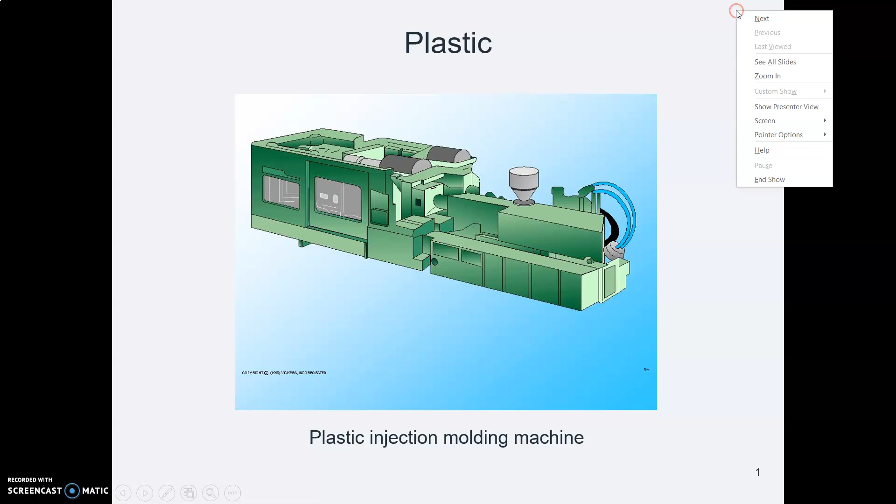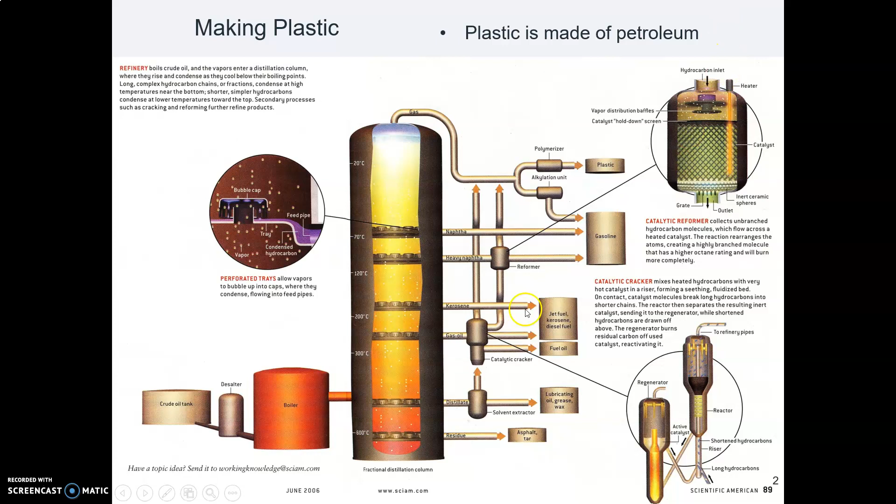Last time we looked at metal as a material. Now let's look at plastic as a material. Plastic is a petroleum product, and crude oil comes in at the refinery, is piped into a distillation column. Various products come off at different heights in the column, and near the end is plastic.

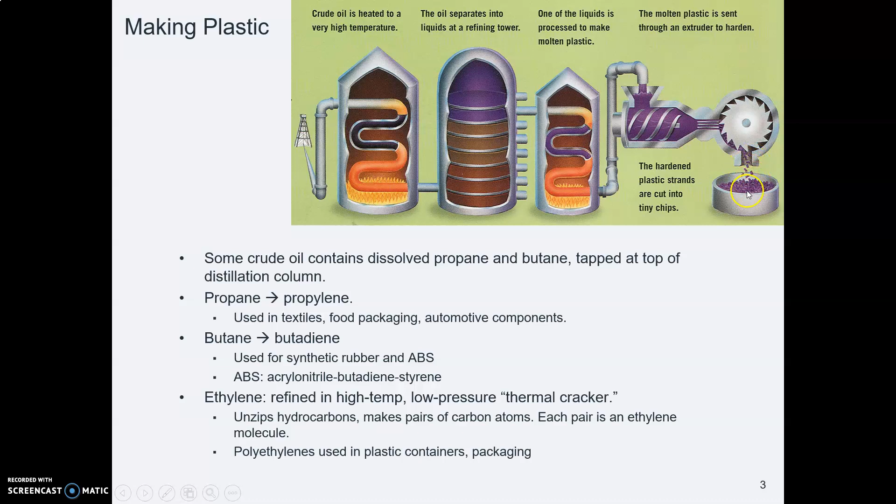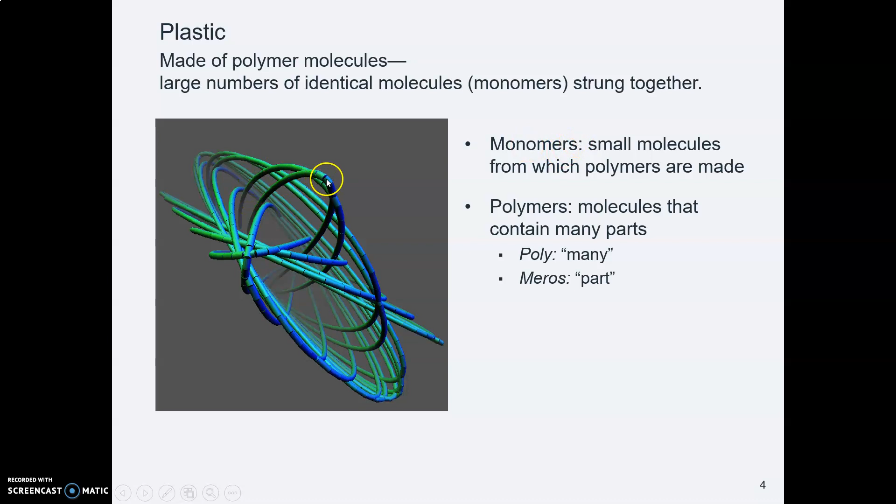And here's a diagram of the plastic getting chopped into pellets. They actually come out white, not purple. Plastic is made of polymers. You've probably heard that word. Polymer is a word made of two parts. Poly means many, and meros, the Greek word that means part. So a polymer is a molecule that contains many parts. It contains many monomers, and monomers are the small chunks of molecules that are strung together to make polymers.

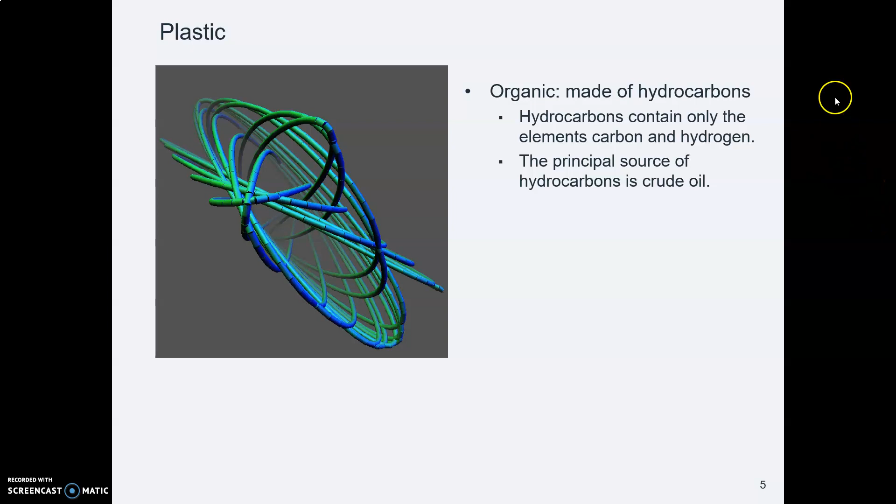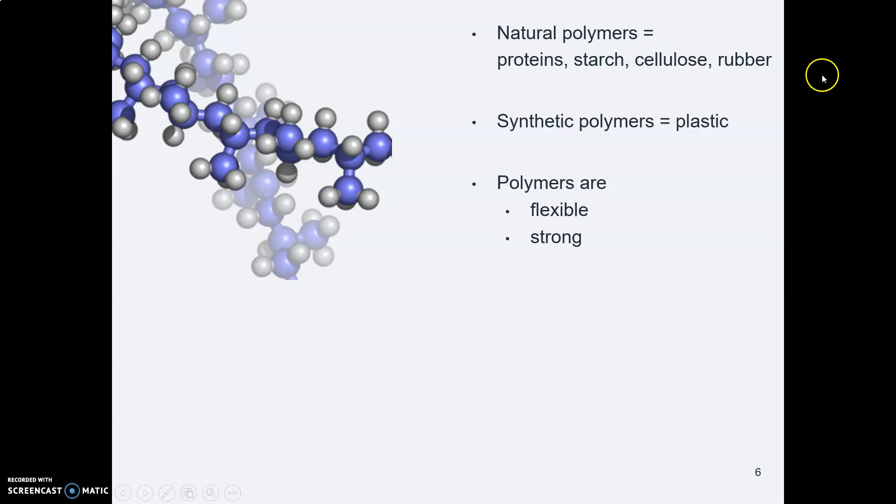Plastic is a hydrocarbon. Petroleum is a hydrocarbon. Living things are hydrocarbons. And of course, petroleum was originally formed from plankton in the ocean, which was made of carbon and hydrogen. Polymers can be made of many hydrocarbon materials. So if they are synthetic polymers, using all sorts of manufacturing processes, then we get what we know as plastic. But in the natural world, there are many polymers also made of many monomers. Cellulose is a common example in plants. Polymers are made of many, many monomers.

All right, there are two categories of plastic, and they behave differently. One is a thermoset. Thermoset plastics, when you heat them and melt them, a chemical reaction takes place. The chains of polymers form molecular bonds, they cross-link, and a thermoset cannot be remelted. It's a one-time melt. You might find thermosets under the hood of a car, some of those plastic parts around the exhaust. Those have to be thermosets so that they don't soften and melt when they get hot. Plastics which are used for microwave cookware are thermosets.

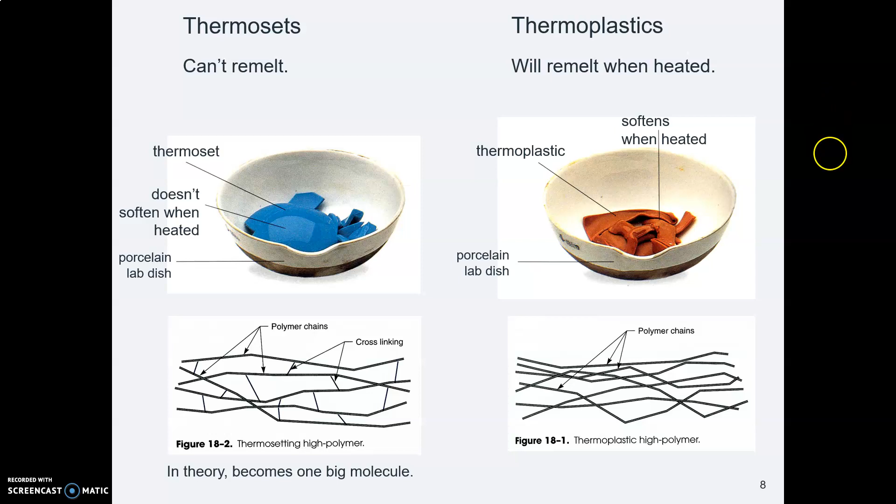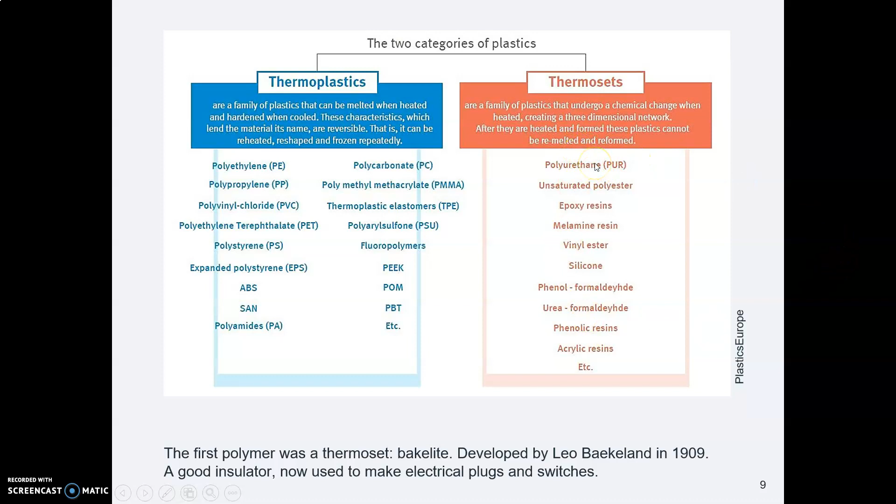In contrast, a thermoplastic is one that softens every time you heat it to a certain temperature. You can melt it, form it into something, and then you can take that something and melt it again and again. That's a thermoplastic. Here is a list of some of the thermoplastics and some of the thermosets that we encounter. So for instance, polyurethane is a thermoset. Polyethylene is a thermoplastic.

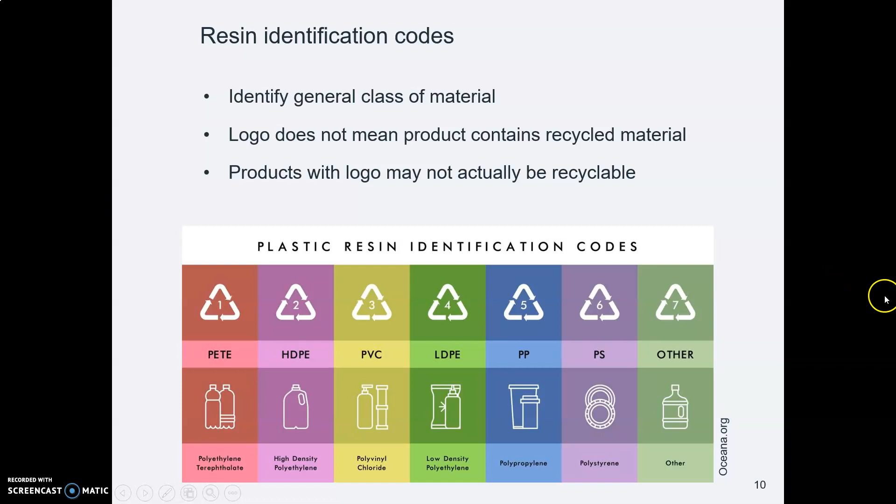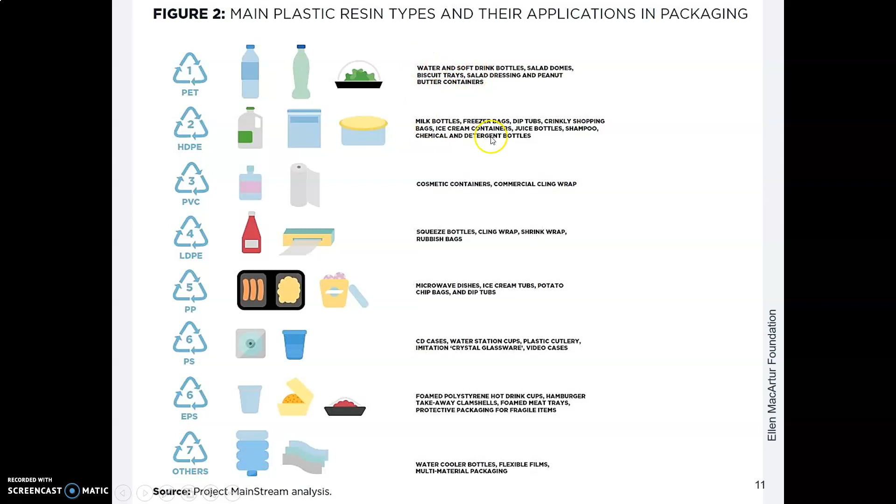When you look at thermoplastics, you often see these triangular symbols with numbers in them on the product. And a lot of people think, oh, that means it's recycled material. Or at least that means I could recycle this. But it actually doesn't mean either one. All it means is the number inside stands for the kind of plastic it is. So, for example, number 2 is high-density polyethylene, and so forth. This logo system was developed by the packaging industry, and there's a story that goes with it, but we won't talk about that here because we have to talk about plastic. Here's an illustrated list showing some of the kinds of products that each of these plastics might be used for.

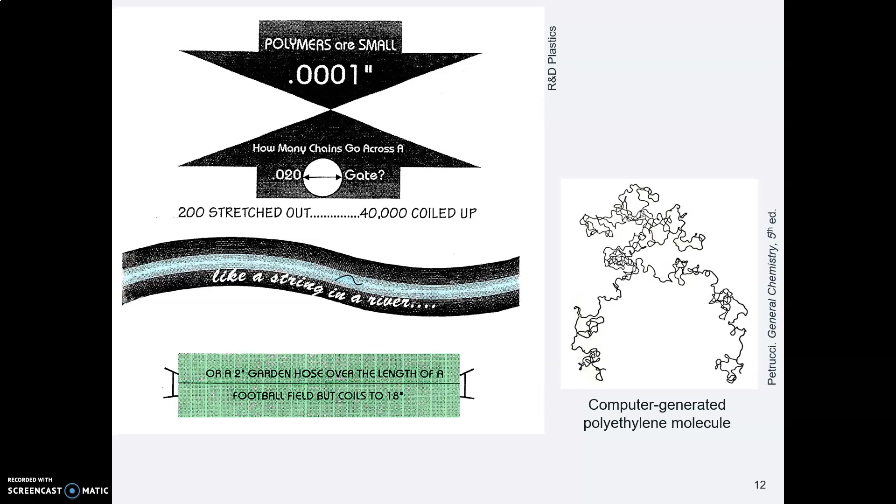Whatever they are, these polymers made of hundreds and hundreds of monomers are small, but they're really, really long, and they're kind of squiggly. So when you're thinking about designing a plastic part, you are designing a flow channel for these squiggly polymers. It's good to keep that in mind next time when we look at the design guidelines for plastics. We're designing a flow channel for polymer molecules.

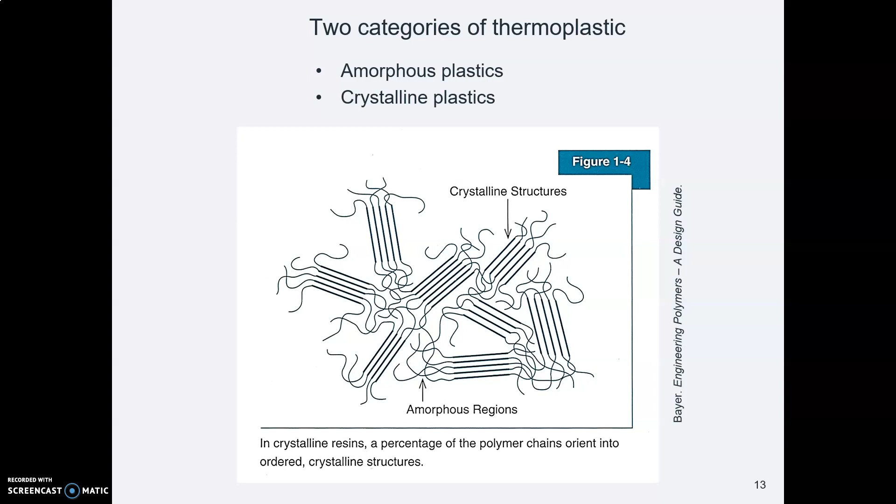When we think about thermoplastics, the ones that can be melted and remelted repeatedly, there are two categories: amorphous, which means without shape, and crystalline, which means they form a regular shape. These categories of plastics behave differently.

So amorphous plastics, like the top of this illustration, have a low shrink rate. After they are melted and then cool, they don't contract as much, but they have some other characteristics that we don't like as much, like they have poor wear characteristics.

Crystalline plastics pack together in an orderly lattice, and consequently, when you melt them and then they cool, they have a high shrinkage rate. So as they cool, these lattices all pack together and get smaller. But they have good fatigue and poor wear characteristics.

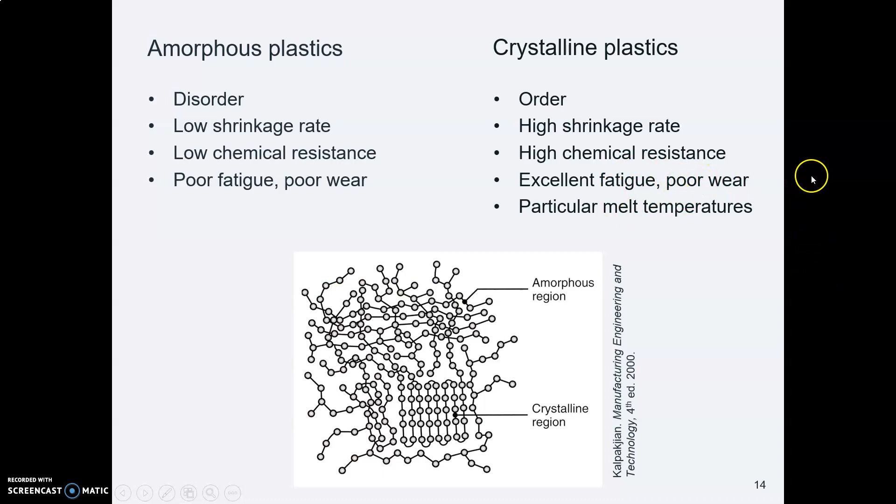Well, this is important to know because you need to pick the kind of material you're using first, and then work with your plastic molder and your tool and die maker, who will be the mold maker, and they are going to design the shrinkage rate into the mold. So if your material has a high shrinkage rate, they'll make this mold cavity more oversized.

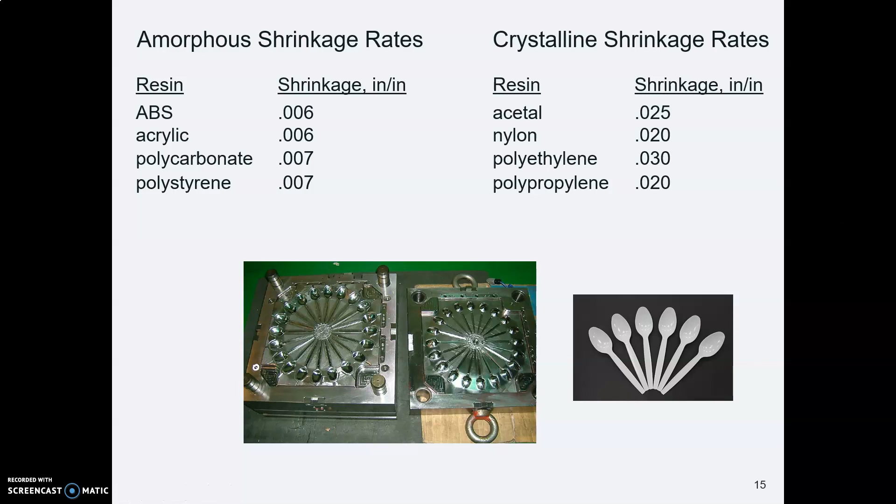If you're going to use an amorphous plastic that doesn't shrink very much, they're going to make it not very much oversized. And there's a real art to designing a mold so that the part comes out the correct size within tolerance. All of this points to the idea that you need to select the plastic material first, then you design the part.

And they put on a free design seminar about once a month. It's for customers, but they also include college students. So you are welcome to join in, and I may send out a mail message to you if I get an announcement of one of these seminars.

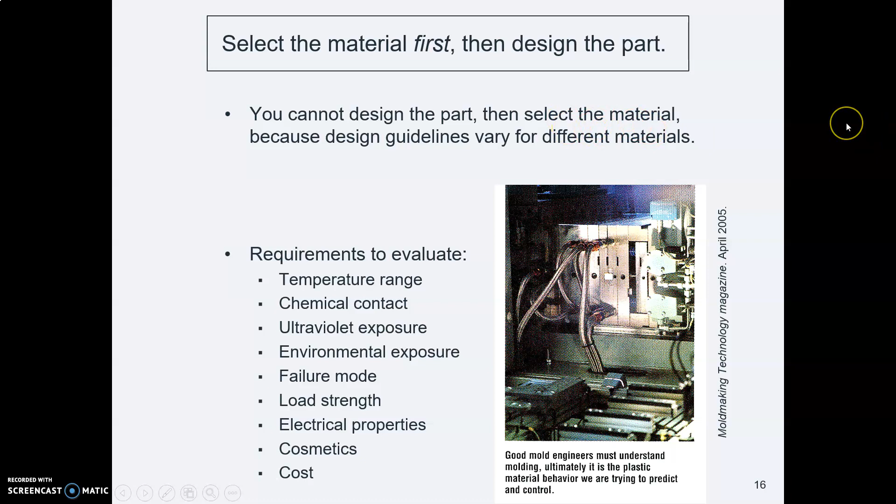They're just quite good. Anyhow, R&D Plastics says, first you have to figure out what material you're using. Then you design the part, because you need to know all kinds of things, including shrinkage rate. So you look at the qualities that you want in your plastic, and that begins to steer you towards the kinds of things you might want.

So, for example, if you've got a little box thingy with a living hinge, a thing that can hinge back and forth many, many cycles, you probably want polypropylene. If you're making a clear window for an aquarium, like here at the Georgia Aquarium, you probably want acrylic. This one is 2 feet thick, and look how clear it is.

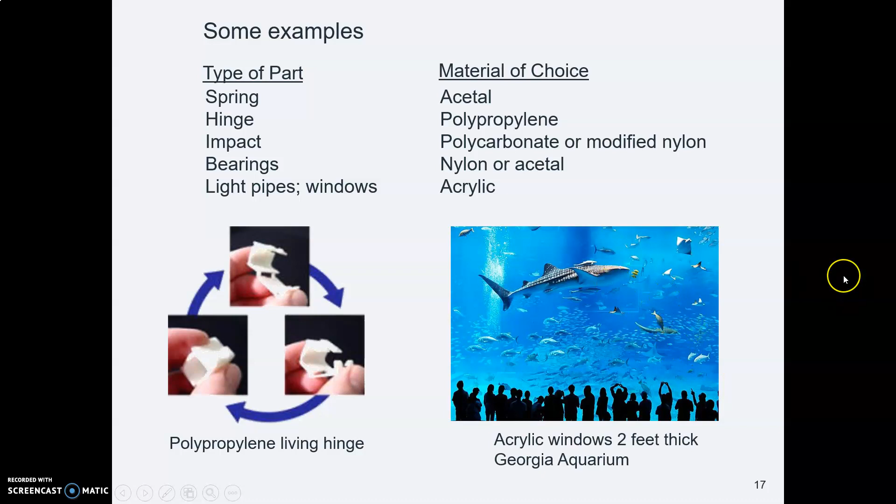Finally, in general, we can't mix virgin plastic that came from the refinery with recycled plastic. Molders need to use virgin plastic with original pellets if they really need to control the characteristics of the product. So recycling of plastic is not truly recycling, it's actually downcycling.

So you can't take a plastic food container, melt it down, and make more plastic food containers. You won't have an adequate quality. So when you recycle food containers, that material gets downcycled to maybe, I don't know, part of a park bench or something like that.

Now, there are some companies that do true recycling, and in the Eugene Springfield area, there's a company called PakTech, which makes lids for beverage containers, and they provide their own recycling bins at stores. And when you have PakTech container handles, you put them in a PakTech bin, and they get sent back to PakTech, and they are truly recycled into more container handles.